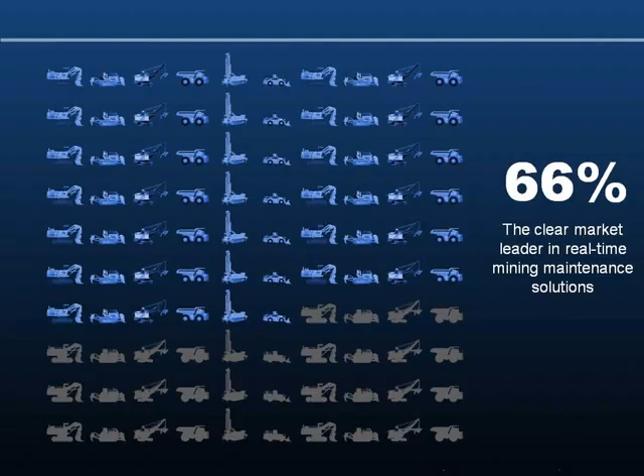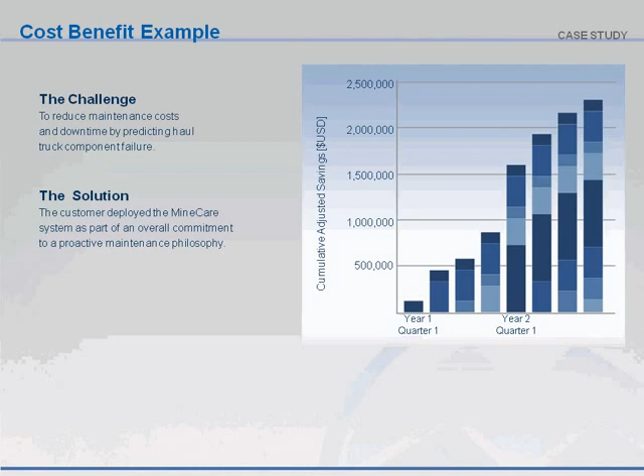This customer identified that when they were implementing the MineCare system, they wanted to focus on reducing maintenance cost and the downtime. They implemented a pretty robust cost tracking system to understand the overall impact of putting in their predictive models, identifying things before they actually failed.

And because of this, they provided us the results from tracking these systems over the first 2 years of having the system implemented. Basically, if you look at the chart, over the 2 years of their implementation process, they were performing change management, focusing on continuous improvement. This organization was able to save over $2 million in their first 2 years. They've made additional improvements, and now they're averaging saving over $50,000 per truck monitored in the MineCare system.

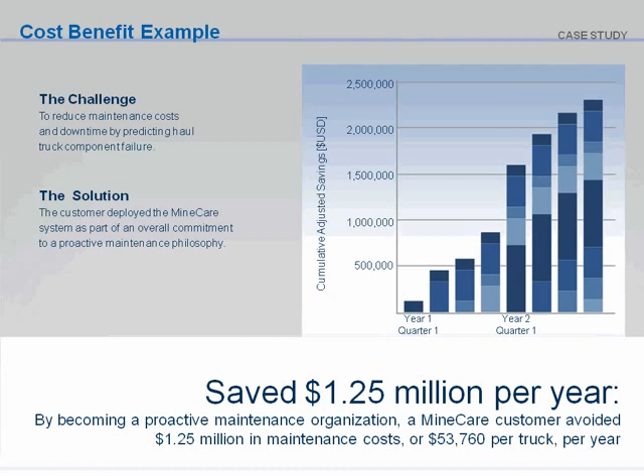All right, right now, if you would take a moment, I'd like to put up a quick poll question. If you'd take it and answer it, but while you're answering this question, I'd like you to consider a couple questions. One, have you performed a detailed failure mode analysis on this component? Two, how many documented failure modes have been identified? And three, how many could be predicted with access to real-time sensor data?

The more failure modes we understand the inputs to and build prediction models against, the closer we will actually come to capacity assurance.

All right, so now we're going to get into the system. So what is MineCare? This is the major topic of this webinar, so we're going to spend the rest of the available time discussing the product that Modular has that's built to assist maintenance improvements through condition-based monitoring.

MineCare was introduced to mine maintenance groups back in 2004. The focus of this product was to provide key sensor data in real time back to the equipment experts. This allowed the experts to make intelligent decisions on the overall health of their equipment. The focus was to assist organizations in their move from a reactive culture to a proactive culture by getting work scheduled prior to failure. It connects a mobile computer to the onboard sensor systems.

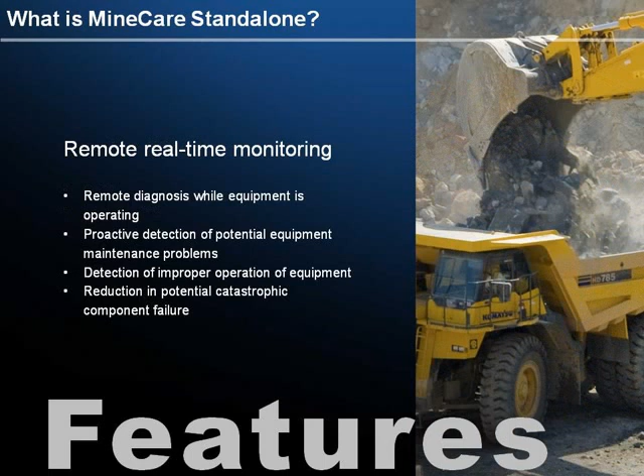The next main feature is the ability to stream sensor data in real time. This allows for the ease of diagnostics to perform some pre-PM. A lot of customers, a week prior to the PM, will have a set of critical sensors they monitor through the MineCare system to identify if any items need to be added to the backlog or front log system during that scheduled downtime. The collection of data for research is another point of the real-time monitoring.

We also have the ability to create automatic data collection by creating your own condition-based monitoring logic through the trending application, for either research or the creation of user-defined alarms.

On the back end of our system, we use a standard Microsoft SQL Server along with Microsoft Reporting Services. That way it's a standard deployment, easy to create your own custom reports through the collected data.

Now I want to talk briefly about the basics of implementing processes for improvement with the MineCare system. As we implement the real-time system, the first thing we immediately see is the overall health of the fleet being monitored, as shown through the active OEM alarms.

These alarms come into our event handling screen, which is our main screen for monitoring, diagnosing, and initiating any processes based off alarm conditions. One main feature of the system is the ability to configure the alarms based on the knowledge of the experts on site. So from these basic alarms being triggered, we want to start entering details about those alarms.

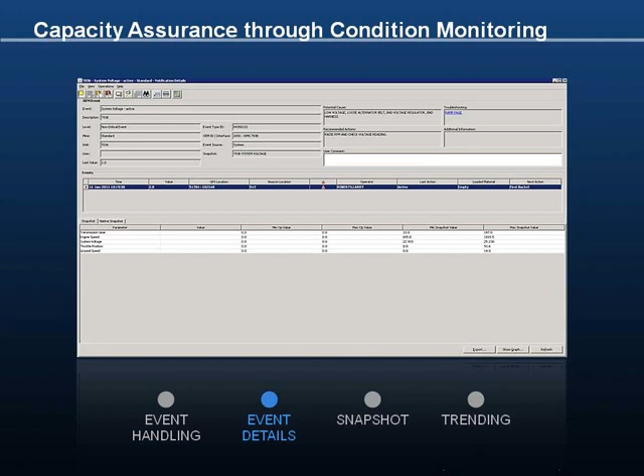So understanding how we got here: first we understood the health of our onboard systems by seeing all the current triggering OEM alarms. Second, we configured the alarms with processes to do automatic data collection and put procedures in with them. Now we're at the point of having this data be collected automatically.

This data comes in showing what occurred before and after the timestamp of our alarm condition. This allows us to start understanding the conditions leading up to and what happens after the alarm is triggered. It's important to collect this data and start building methods of predicting these conditions so we can prevent alarms that indicate a failure is about to occur or has occurred.

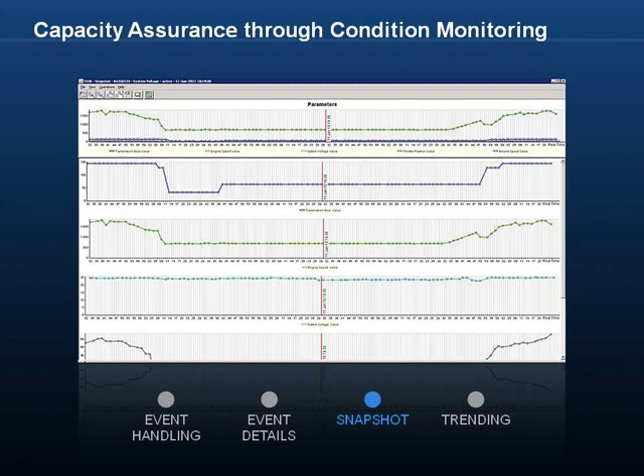So the final step of this CBM process is to go into our trending application. This is extremely critical because our ability to enter condition-based monitoring logic in the trending tool will help us predict those failures. And why do we do this?

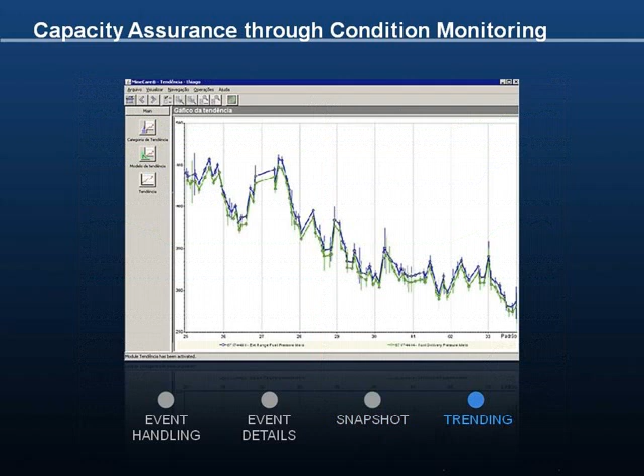One common way is to implement preventive maintenance. This helps move us farther back on the curve, but condition-based monitoring, another predictive science, allows us to move even farther back, understanding the potential issues that are out there causing our unscheduled downtime.

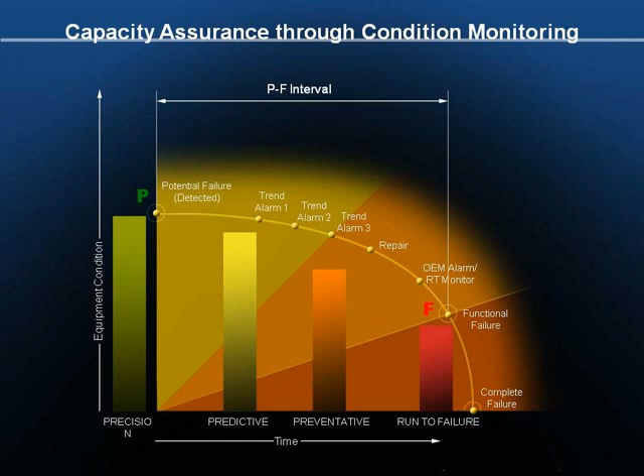All right, the last topic I want to quickly cover is a couple examples of how customers have improved availability and reduced cost. I won't spend too much time on these. They are available on our website, and you're also able to contact myself or any Modular representative to get more detailed information about these case studies.

The first case study I mentioned during this presentation: the customer needed a method to address injector failures, and they needed a process that would allow them to schedule repairs rather than having unscheduled repairs and inconsistent policies around whether or not to bring the equipment in. This was the case study I quickly mentioned earlier in the presentation.

So what they decided to implement was monitoring the delta between the bank temperatures, and they wanted to monitor at a greater delta than the OEM recommended. The engineers would capture this data through the trending and then review the captured data to understand the severity. From there, they would produce a report to give to the maintenance planners to schedule based on priority.

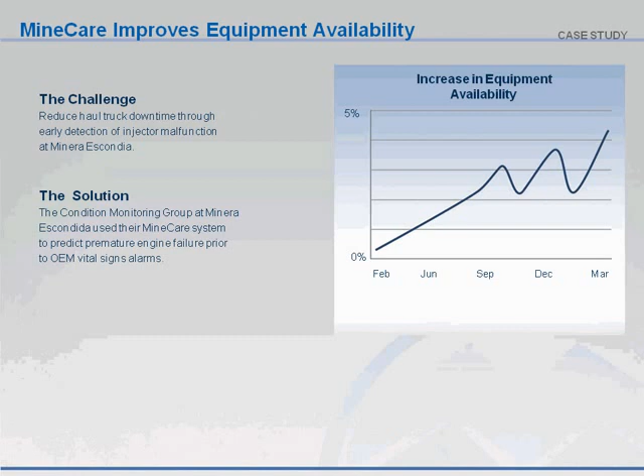This process resulted in an overall improvement of availability by 4%. Because of this process, this group was able to move from only monitoring on trucks to monitoring on all their equipment running diesel engines.

They were also able to reduce the amount of time required to replace the injectors. As far as reducing the amount of time, there's a nice write-up about how they did that, or you can contact us. It's really an impressive process that they implemented.

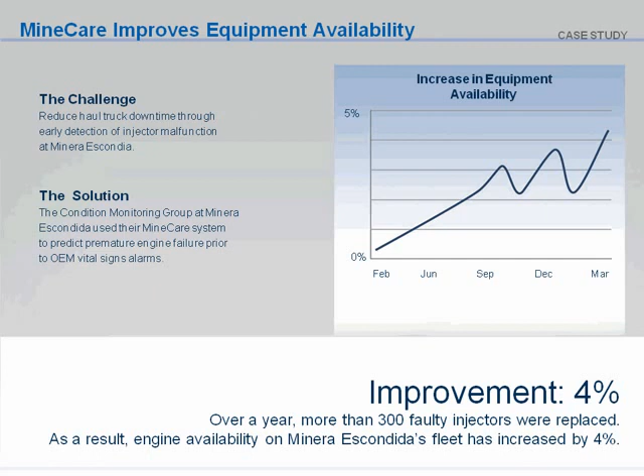The next case study was an opportunity for a customer to use our automatic data collection through trending to understand how much fuel was being used during a common dumping technique by the operators. When dumping a large truck, it automatically raises the RPM up to about 1,500. Operators believed that if they pushed down on the throttle and raised the RPMs up to about 1,900, the bed would lift quicker and save time at the dump.

So this organization wanted to understand if it did increase or decrease the amount of time dumping, and what was the cost of the fuel. They set up two sample sets: one set of trucks was using the standard dumping technique, while the second set was doing the high RPM method.

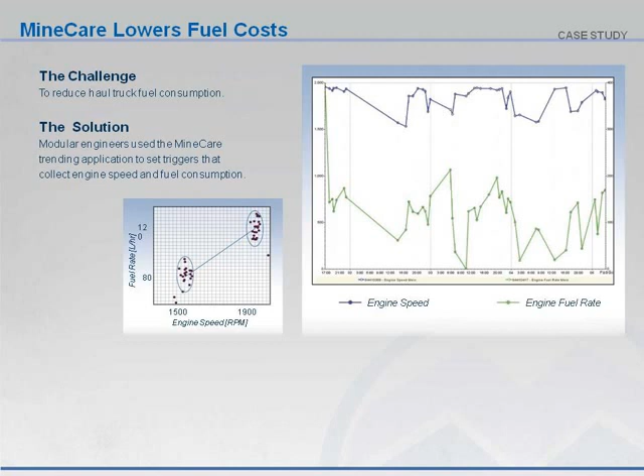This customer identified that at this high RPM, it did not lift the bed any faster than the standard operation. They also calculated, based on the difference in fuel used between 1,500 and 1,900 RPMs, that by eliminating this technique they could save approximately $300,000 plus per year in fuel savings.

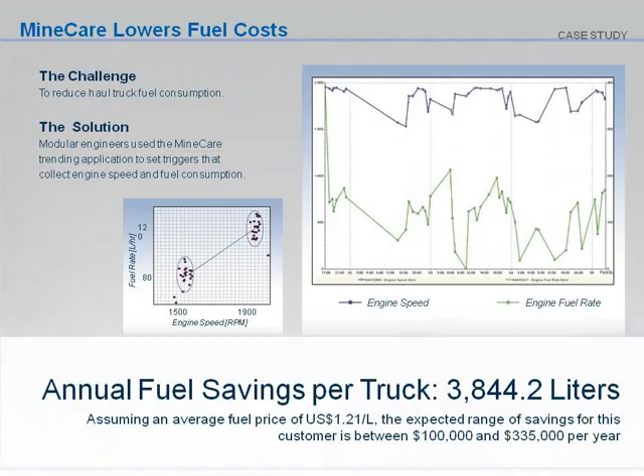I think we should continue to look at the ultimate goal of capacity assurance with process improvements that will hopefully reduce cost, improve our availability, and lead to increased production or efficiency gains in production.